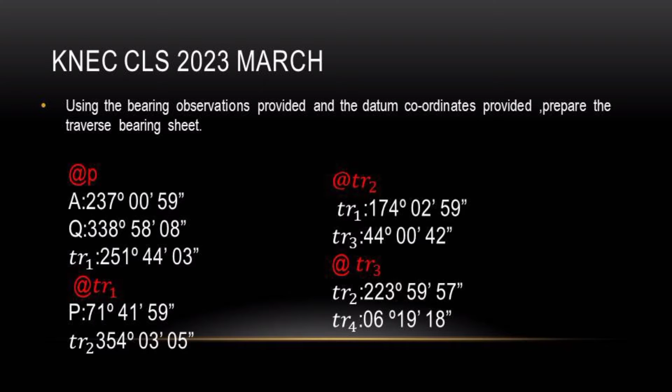We can observe from the question that we have coordinates given for the control points: P, TR1, TR2, TR3, TR4, TR5, TR6, and our last control point Q. In the question we are given the coordinates. They expect us to use the datum coordinates to get the accurate final bearings that are supposed to be used in our bearing sheet. We can observe from P we have A, and from P we also have Q, and our last point there we have TR1. Let's go directly to the datum coordinates given to us.

We are given the datum coordinates for P, A, and Q - the northings and eastings. Those are the latitudes and departures used to calculate either the bearings and the distances. We can get either of them.

In our question, we are interested in the bearings because, as we can observe, we are only given the observed bearings, and we need the final bearings of at least 4 points in order to get the correction for the orientation.

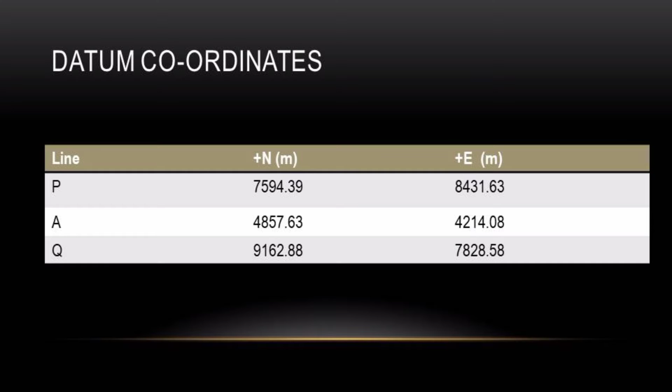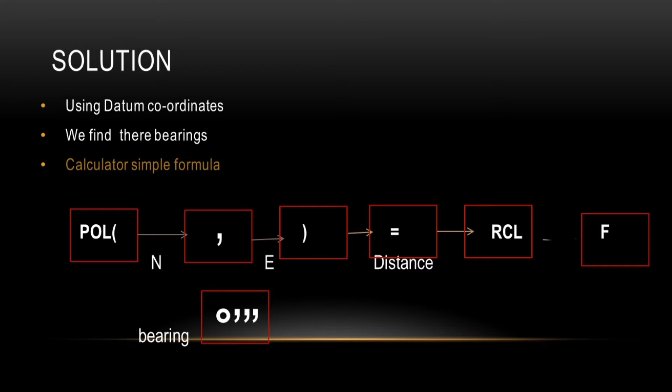What we are going to do, I found the most simplified way: we are going to use a calculator. In our normal calculator, the 82 series - the normal calculator we use in the exam, not the programmable or scientific calculator - we are going to use that calculator to solve these problems more efficiently and faster.

First of all, we have other formulas that I've already taught you in other videos, but today we are going to use a more simplified way. In this simplified way, we are going to find the differences in the northings and the eastings. Those are the values you're going to input into the calculator. There I have shown you a formula - that is the simplest formula I found using a calculator.

By the formula, we are going to start with finding the bearing of AP. In finding the bearing of AP, we use the difference - so we minus the northing of A from that of P, and also the easting of A from that of P. The difference in the northing of AP will be 2736.76, and the difference in the easting will be 4217.55. Those are the values I'm going to input into the calculator.

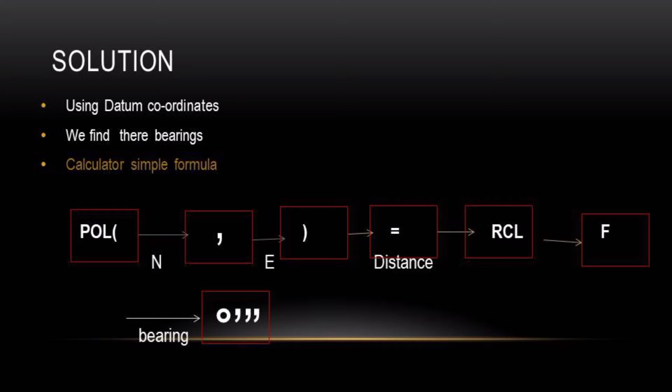We go ahead using our calculator. I've demonstrated how you are going to use it. You press Pol - this is for polar coordinates. We are going to pole these values to get the distance and the bearing. You press Pol, which already has a bracket there. Then the first value you input is the northing, which we calculated earlier as 2736.76. You write a comma, input a comma in the calculator, then the easting, that is 4217.55. Close the bracket, then press the equal sign.

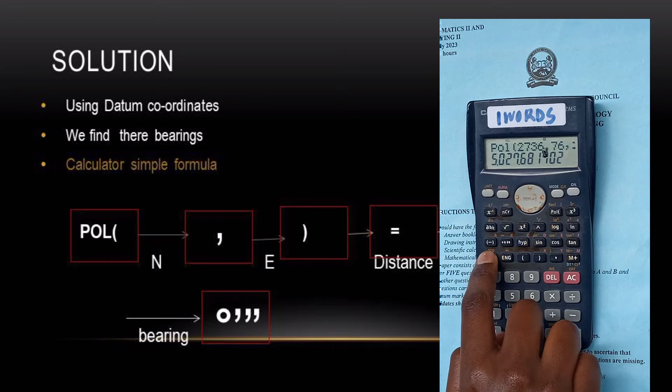When you press the equal sign, you'll be given the distance, but as we are interested in the bearing, you go ahead and press RCL on the calculator. After doing that, you press F - first make sure you pressed the one on top, then you press F. After pressing F, it gives us the final bearing.

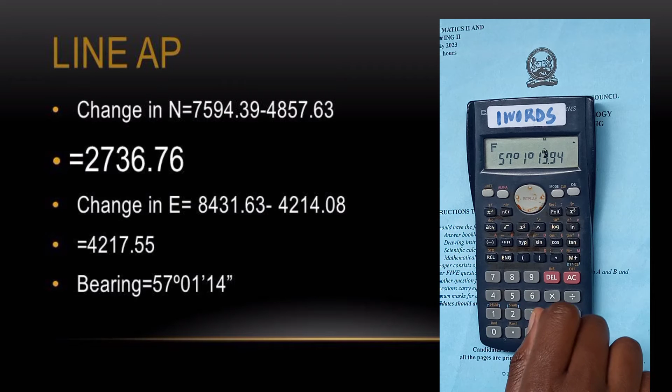So that is just a simple way. I've demonstrated that. You can repeat it as much as possible to get this concept of calculation. After doing that, the value of AP, the bearing will be 57 degrees 1 minute 14 seconds.

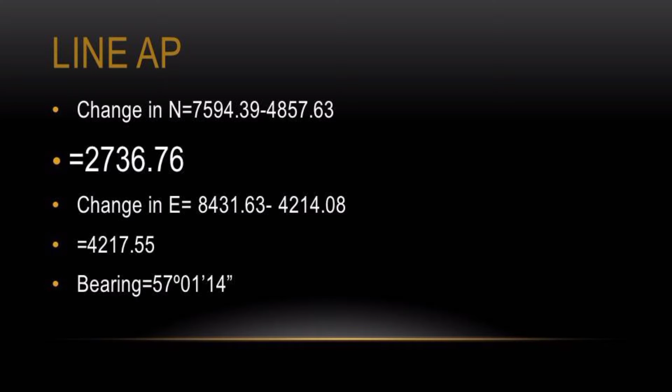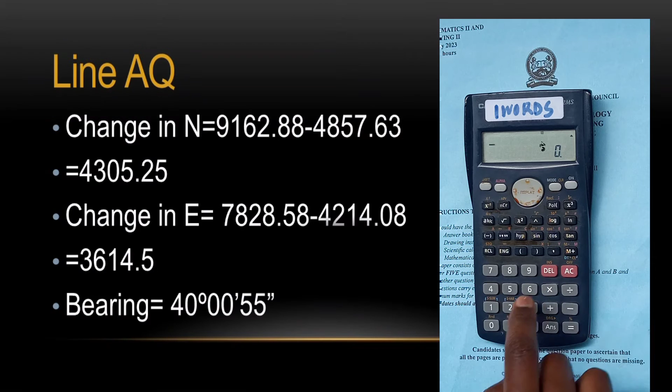Then we are going to do the same to the rest. I want to calculate as much as possible and find the final bearings, so that I can compare, because those will be the values I'm using on my table. For P, I make sure I calculate for PA and for PQ, and on my table I make sure I do the same for QP and for QA, because those are the values I'm really interested in. Make sure you arrange your work.

The next one, let me calculate the bearing for PQ. The bearing for PQ, that will be the difference when you write, that will be PQ. So I'm going to subtract the value of P from that of Q for both my northing and my easting.

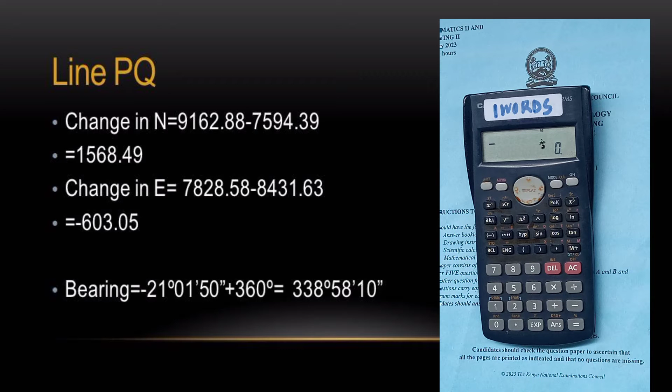After which, make sure you properly use your calculator. The difference in the northing will be 1568.49, and then my value for E will have a negative, so that is negative 603.05. Those are the values I'm going to put in the calculator using the formula I had earlier shown you. After doing that, my answer becomes a negative.

So when my angle is a negative, by use of a formula we used to apply in high school - you can go and remind yourself the trigonometry equations - I will add 360 to my negative in order to get my final bearing, and my final bearing will be

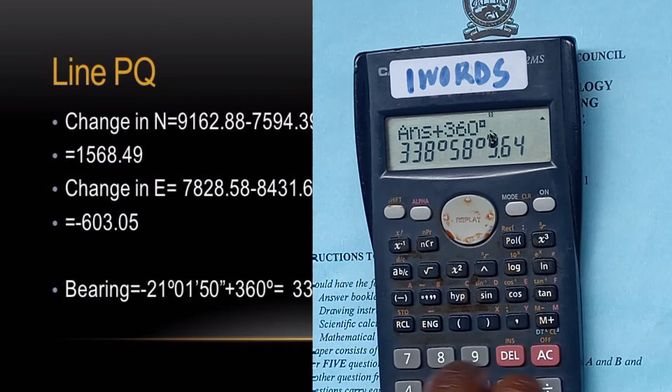338 degrees 58 minutes 10 seconds. I do the same to all the others, after which I will get

all my values. So we'll try again for AQ. For AQ, we do the same, so we subtract the northing and the easting and we Pol. We are going to have a positive answer, so we don't have to add anything.

That will give us a direct answer, as you can observe. After doing that, I come again - in order for me to get any value, I'll either use a back bearing of that value or a fore bearing of that value in order to calculate whatever I'll be calculating. After which I've displayed a number of angles, and the angles I'm going to be using are the ones I've shown you.

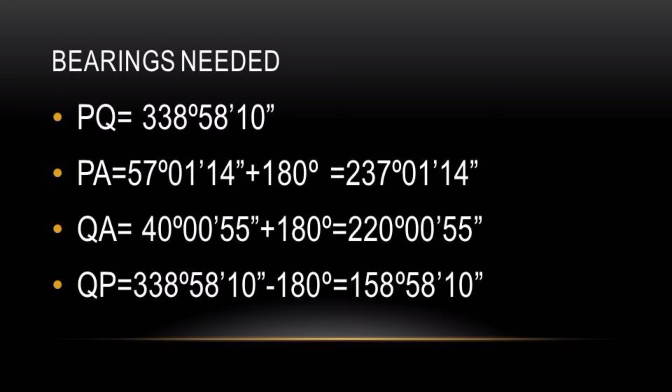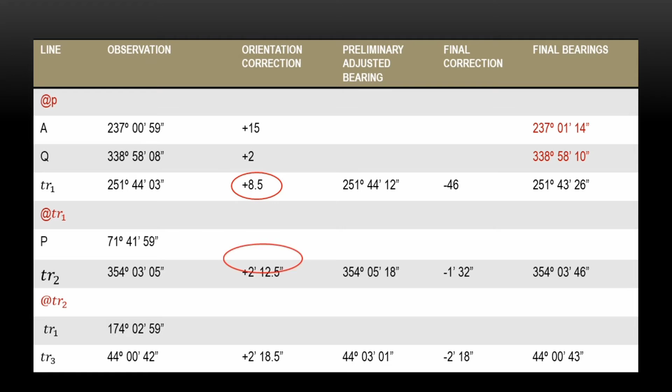Having done that, I go back and draw my bearing sheet. On my table we'll have the value for the line, the observation with the orientation correction, the preliminary adjusted bearings, the final correction, and the final bearings.

Having done that, I start with my first value, that is from control point P to A. I write my value there, the one for the observed value we had been given in our calculations. I write for Q and for T R.

I had done earlier all my calculations, so I already have the final bearings from my polling, from the polar coordinates I had done there. Those were from the polar coordinates, so I got my final bearings from there. And from

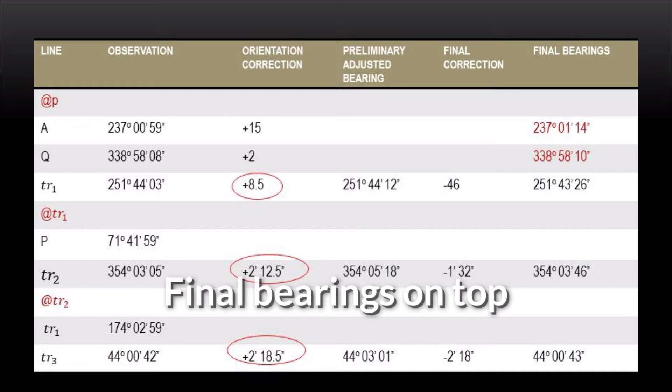the fore bearing of PA, that will be 237 degrees 01 minutes 14 seconds, and that of PQ will be 338 degrees 58 minutes 10 seconds, and those are the values I'm going to use.

First of all, in our column for the observed bearings, in order for me to find the orientation correction, I will need to know how much I need to do in order to get the final bearing, which is correct.

I'm going to take my final bearing and subtract it with my observed bearing, and I get a positive. That will be the angle needed in order to add to correct, in order to find the final bearing. I will do the same to PQ, subtracting 338 58 08 from 338 58 10.

Having done that, we get the orientation correction as 2 seconds. We subtract, and after subtracting we can observe that we need to add those values for us to get our final bearings. Coming to the orientation correction column, I add both my seconds, 15 plus 2, getting a total of roughly 17. We divide it by 2 to find the mean. After dividing by 2, I find the orientation correction to apply to the next point, that will be 8.5 seconds.

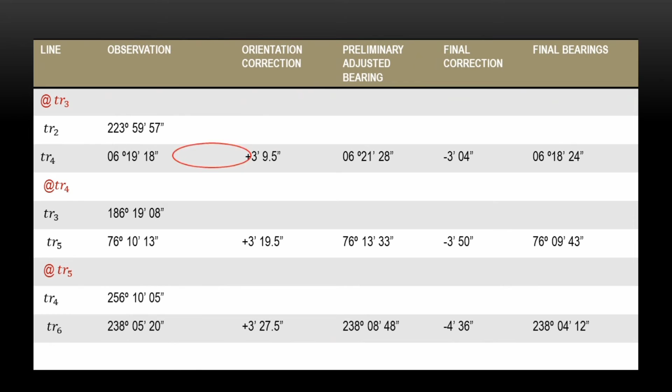The same is done. From TR2 to TR3, we have a fore bearing of 44.0042. To get our back bearing we add 180 degrees, giving 224.0042. We subtract with the value given as our back bearing: from TR3 to TR2, the back bearing is 223.59.57. Having subtracted that, we see we need to add a lot, as shown in the calculator. That addition is applied to the previous orientation correction of 2 degrees 18.5, that is 2 minutes 18.5 seconds. We add our correction and get our next orientation correction as 3 minutes 9.5 seconds.

The same is done. From TR3 to TR4, we have a fore bearing of 6,19,18. To get our back bearing we add 180, giving 186,19,18. But we have been given our back bearing as 186,19,08. The difference between the two is positive 10, so we need to correct the value by positive 10 to get the right answer. That positive 10 seconds is added to the orientation correction, giving 3 minutes 19.5.

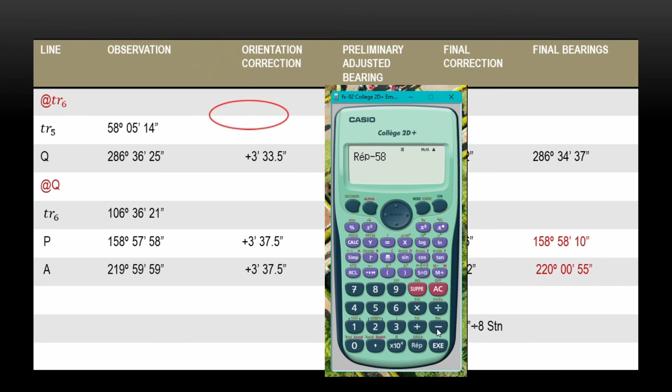On our observed column we had been given 58 05 14. By subtracting that, we find we have a positive correction of 6. Adding that to the previous value, our answer becomes 3 minutes and 33.5 seconds.

Then we move to the last section. Our value there is a bearing from TR6 to Q, which was 286 36 25. Subtracting 180 degrees to get our back bearing, we get 106 36.

25. But in the observed section, the back bearing was given as 106 36 21. By subtracting that, we get a positive 4, which will be added to our previous orientation correction of 3 minutes and 33.5 seconds. That will be applied to both P and A.

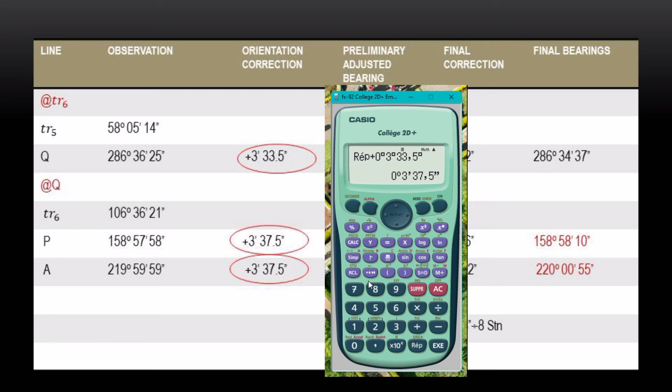Having finished that side, we move to the preliminary adjusted bearings. In the last part, for P and A, we correct the observed values first. That is 158 57 58. Then we add 0 degrees, 3 minutes and 37.5 seconds, and we get our final value as 159 01 36.

Having done that on the preliminary adjusted bearings, we have our final bearings calculated earlier from the datum coordinates we were given. We need to see what was done in order to get our final observed bearings.

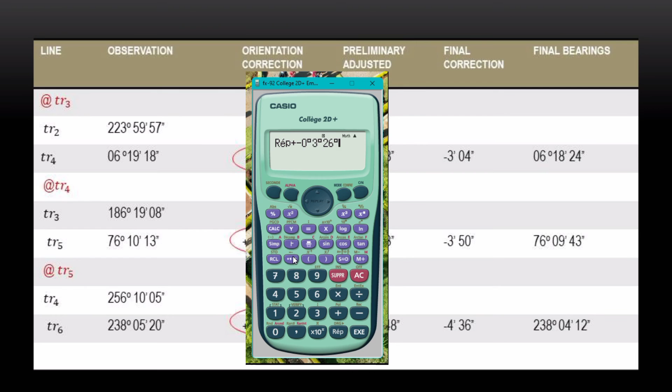Having done that, we add the 2. After adding that, I divide the total by the number of stations. We had 8 stations: P, TR1, TR2, TR3, TR4, TR5, TR6, and Q. You can count them, those were 8 stations. By dividing that, I find my final correction.

My first final correction is negative 0 degrees 0 minutes and 46 seconds. That will be applied to station P, which I will correct in the P column.

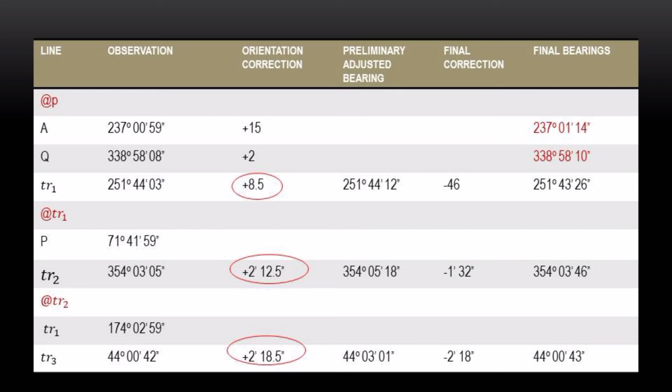After having done that, I apply the final correction by adding that error in sequence. I add negative 0 degrees 0 minutes 46 seconds by the same 46 seconds, and get the final correction applied to TR2 as 0 degrees 1 minute 32 seconds. Then I add again 0 degrees 0 minutes 46 seconds, and get my next value as 0 degrees 2 minutes 18 seconds.

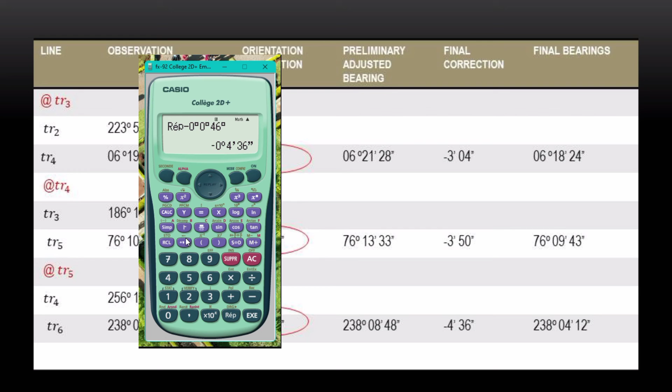In the 2 minutes 18 seconds, I add again the 46 seconds and get 3 minutes and 04 seconds. I again add the 46 seconds and get a negative 3 minutes 50 seconds. I again add that 46 and get a negative 4 minutes 36 seconds. I add again the 46 seconds and get a negative 5 minutes 22 seconds.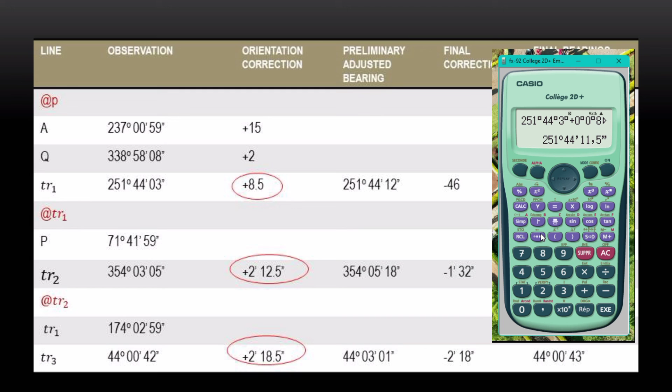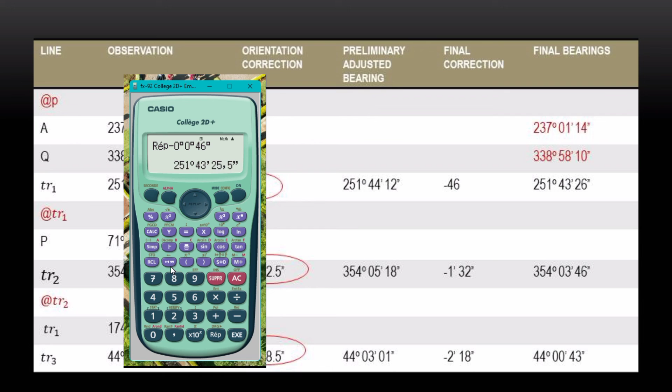Having done that, I move back to my preliminary adjusted bearing. We add the orientation correction to the observed values, and when you add the observed value and the orientation correction, you get your final preliminary adjusted bearing. On that preliminary adjusted bearing, you subtract the final correction to find the final bearing. Use your calculator well here, and the same will be done to all those stations.

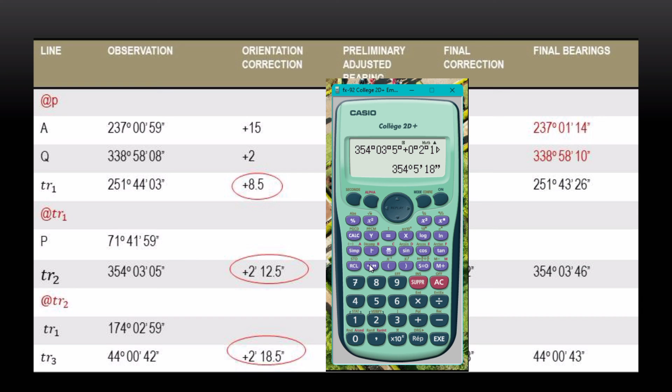So you add the observed bearings and the orientation correction, and when you add that you get the preliminary adjusted bearing. When you get the preliminary adjusted bearing, you subtract the final correction, and you will get your final bearings. That will be done to all our other parts. Finishing that, you will be set and good to go.